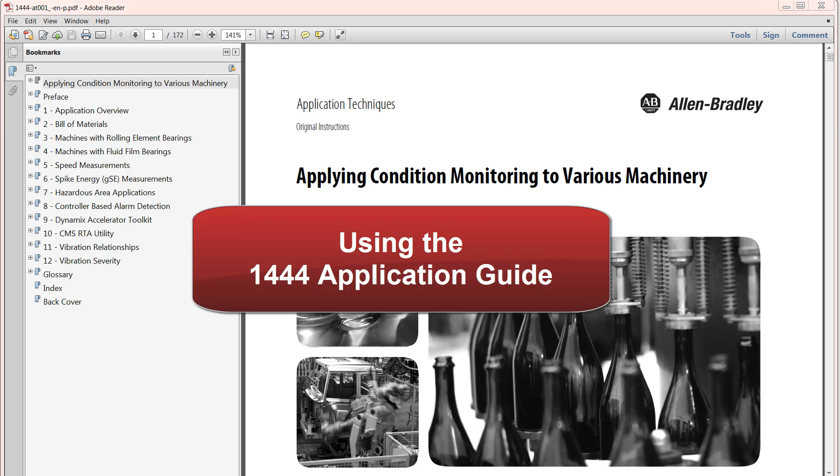This video is intended to explain how to use the Dynamix 1444 series application guide as an aid in determining and implementing monitoring solutions based on smart machine concepts. The guide will help to explain how Dynamix can be applied to make a smart machine. Smart machine technology, when built into the integrated architecture, can enable solutions that make machine conditions simply part of what you do.

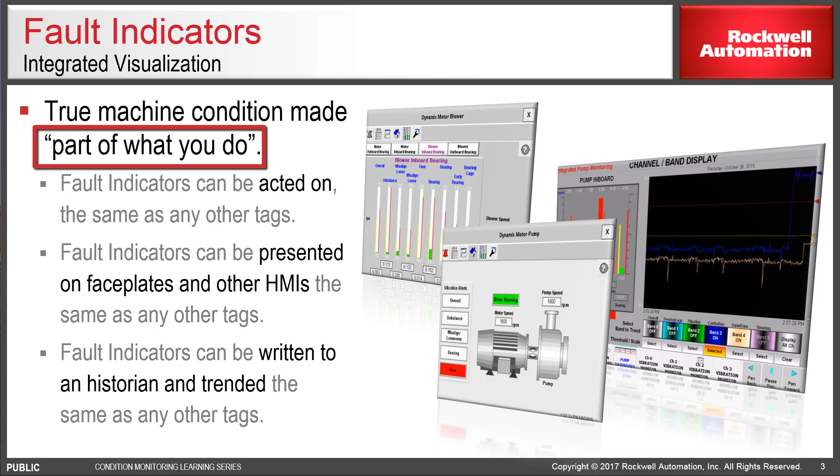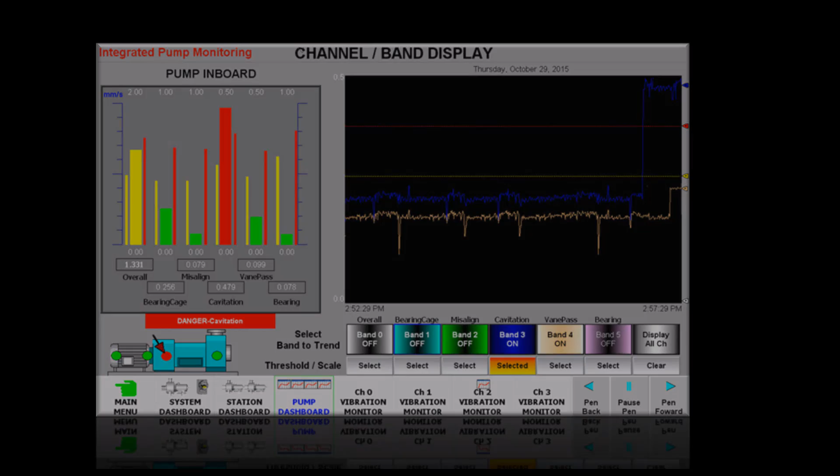Presenting condition rather than simply vibration encourages very different behavior in operators, maintenance personnel, and management. Consider the difference in behavior if a high vibration alarm is presented versus the behavior if the indication was severe cavitation, moderate misalignment, or severe imbalance. And how does behavior change when responsible personnel can observe the propagation of these faults simply and easily using the same tools that they use to trend other common parameters such as load, pressure, temperature, or tank levels?

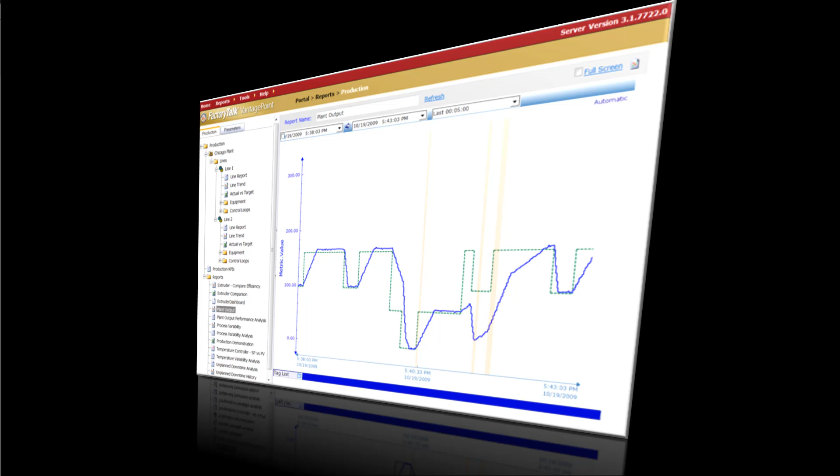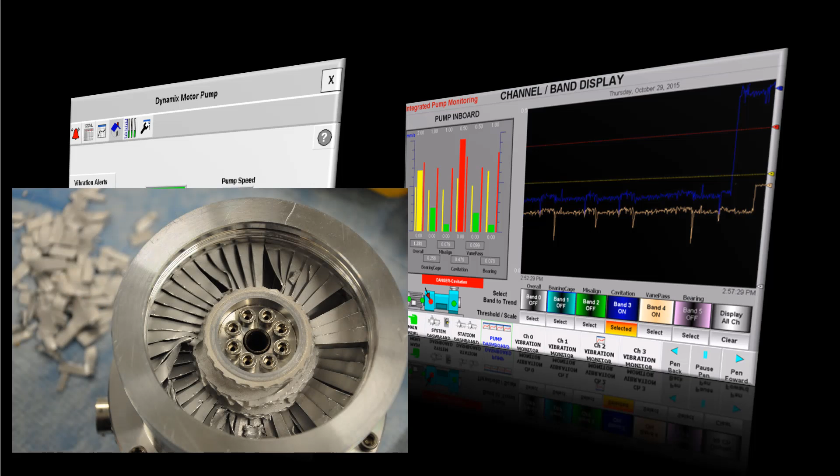Using these tools allows users to easily correlate vibration, or for example cavitation, with other process parameters. It may take something, such as a specific combination of valve position, tank level, or pressure in a particular operating pump, to cause that pump to cavitate violently. How would knowing this affect operations? How may it benefit the facility?

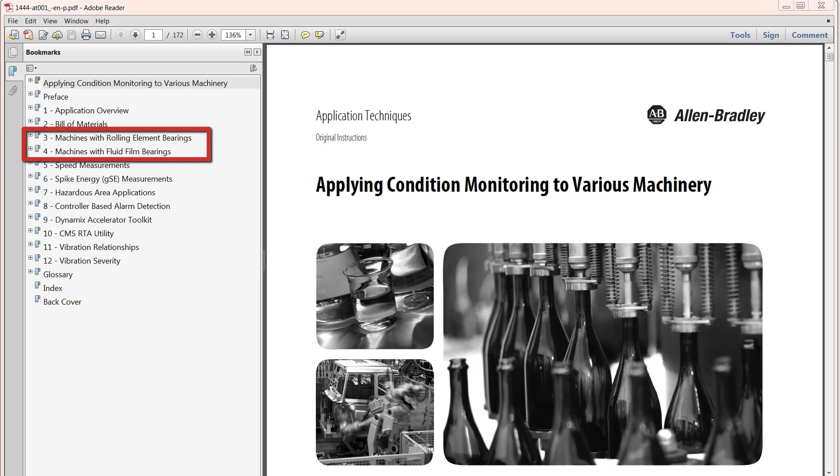So let's look at the guide. First thing to understand is that there are three major areas of the guide. There's the introductory part, which includes some important information that is used in the actual machine definitions themselves, and then of course the machine definitions, which talk about how to monitor the machines. And thirdly, it includes sections that provide ancillary but often very useful information.

So let's look at the machines. In the application guide, machines are grouped as those fitted with rolling element bearings and those fitted with fluid film bearings. Now let's look at machines that are fitted with rolling element bearings. The list is broken down by the machines that are components of the larger machine. These are the drivers, typically motors, but perhaps turbines of some sort, and then the driven equipment, whatever it is driving, whether it is a pump or a fan or a blower or perhaps a gearbox.

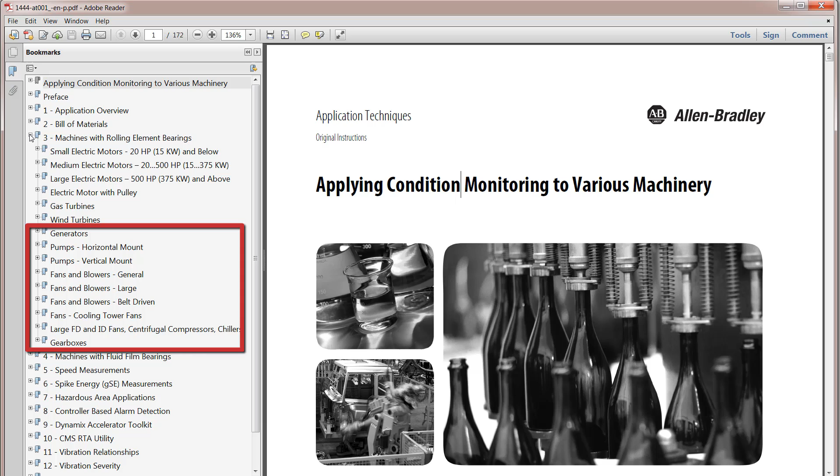If we look at a specific machine, let's say a belt-driven fan, you'll see that the information in here includes monitoring requirements and the sensors, and then the faults and the band limits and definitions, and then the alarms that you might apply. And these are going to be the same regardless of the type of machine. They will all have the same kind of information.

If you look at the details, the sensor and monitor requirements always come first. And this one is very brief. It simply says the fan is monitored with one or two general purpose sensors that are mounted at each bearing. Okay, so how do we understand what that means?

The sensor requirements are actually defined in the bearings discussion. So where we talk about bearings, it will talk about the sensors that you have to apply and give you some guidance on how many to apply and where to mount them. So if we look at that, look under bearing type. In this case, we're using rolling element bearings. If you go down a page or two, you'll see that there's a discussion that says for machines up to 500 horsepower, one radial sensor per bearing is normally sufficient, normally mounted in the horizontal direction.

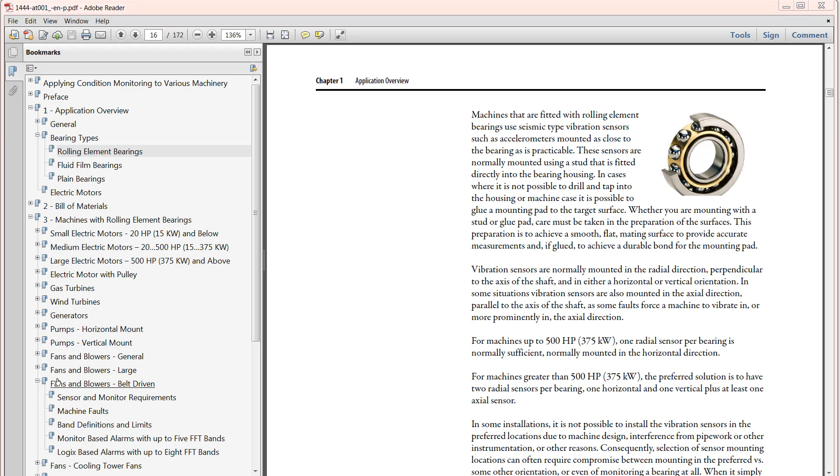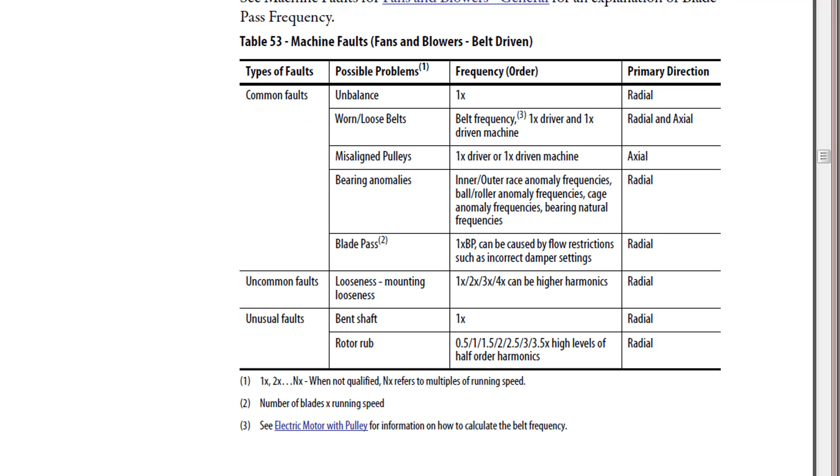So for the fan, coming back down here, you will simply mount one sensor, if it is a small fan anyway, under 500 horsepower, in the horizontal direction at each bearing location. The machine faults then are listed following that. This is a list of the common faults that might occur on the machine, and the uncommon ones that are unusual but might occur, and unusual faults that are pretty rare.

After the machine faults, the guide then talks about band definitions and limits. The band definitions are simply some guidance on how to set up the larger signal processing such as Fmax, the maximum frequency of the measurement. These will be applied to the bands, which we'll talk about in a minute.

But in the section as well are the alarm limits. And this is talking about the overall alarm limits that are applied to the measurements that are made. Overall is a very common thing. It is for most machines how you monitor them, and is the big guidance number that protection is almost always based on anyway, and what standards are applied to.

So in this example, it is telling me what the overall alarm limits are for this class of machine. And it also tells you where these come from. It talks about ISO standards that are applicable to this particular machine. In this example, there are two ISO standards that may apply, 14694 and 10816-7. Those are actually listed in the guide as well.

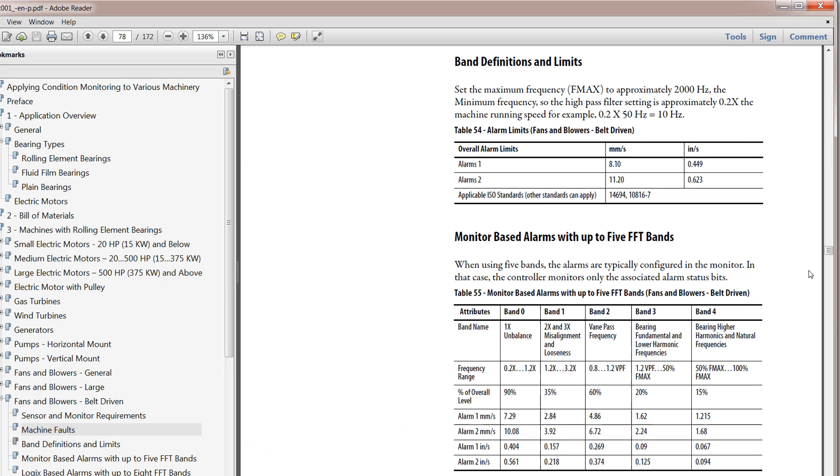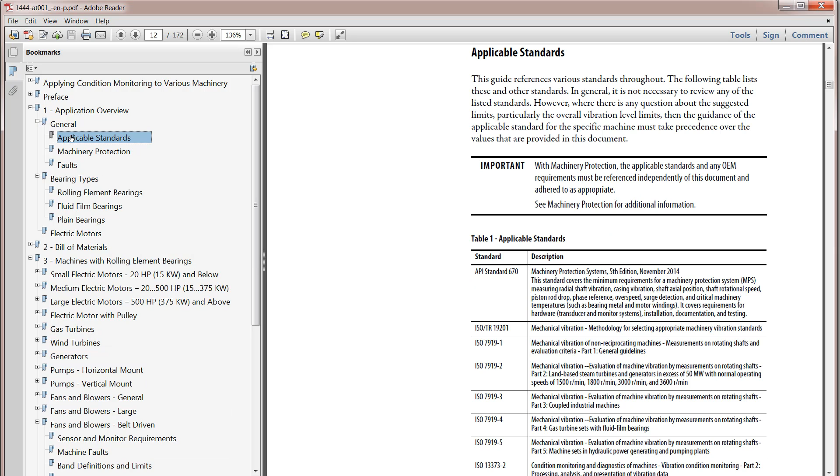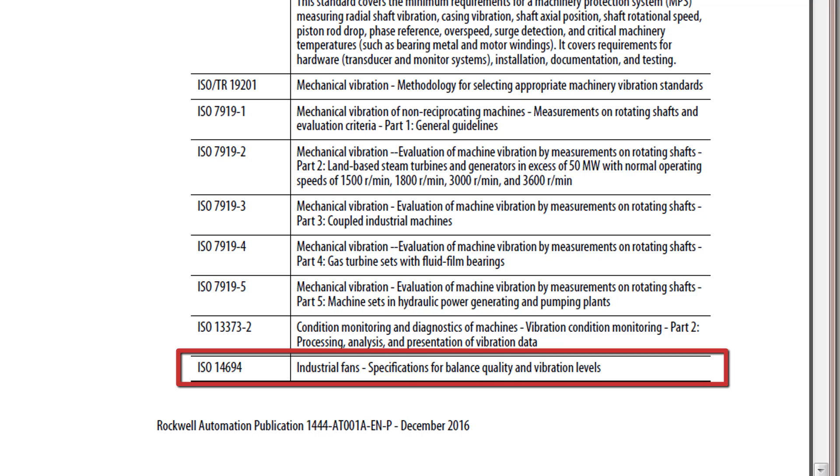If we go back to general information, applicable standards, then scroll down to find 14694, a little too far. And there it is at the bottom, industrial fan specification for balance, quality, and vibration levels. So that's where, if the user wants to get into more detail of where the specification comes from or what the number means, that's the standard.

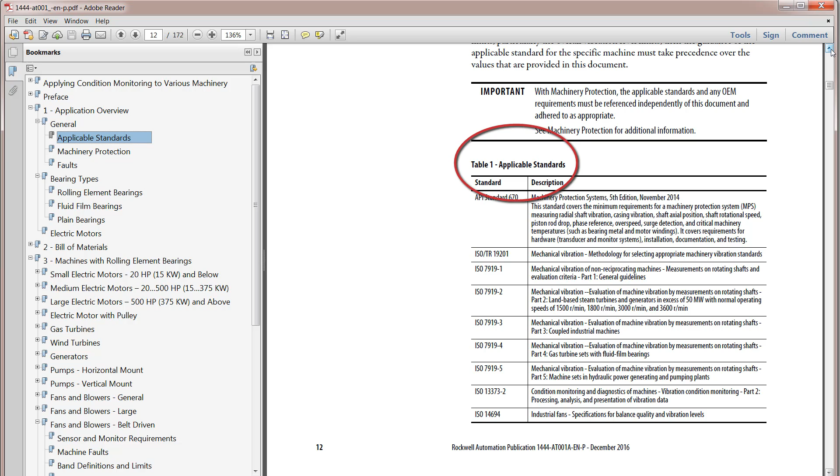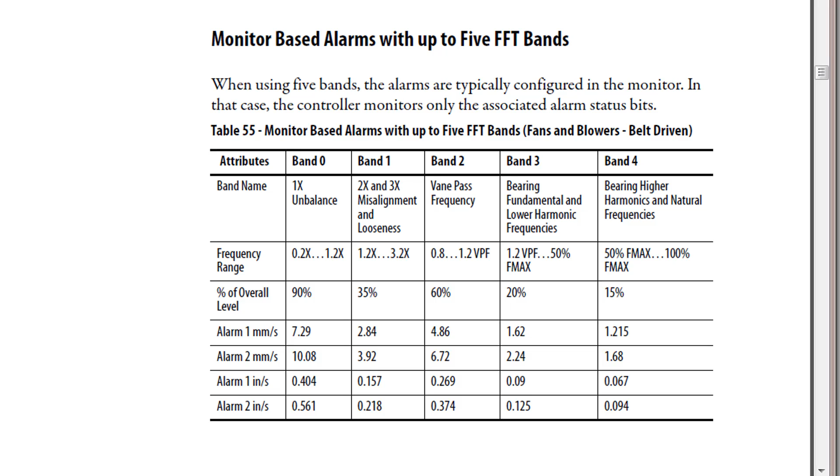This then is a list of all of the standards that apply and that are referenced in the guide. It's where the overall alarm limits that are stated throughout the guide come from. Following the band definitions and limits, we have the list of alarms that we would define. These are defined in terms of FFT bands. We talk about bands that you would define to monitor typically the common faults that we just talked about and how you would do it.

So this example talks about how you set up 5 bands. Band 0 is going to monitor the unbalanced force. Band 1 is going to monitor for indicators of misalignment or possibly looseness. Band 2 is vane pass frequency, and that is an indicator of turbulent flow, so you have a flow problem through the fan. Band 3 is bearing fundamental and lower harmonic frequencies. And band 4 is bearing higher harmonic and natural frequencies.

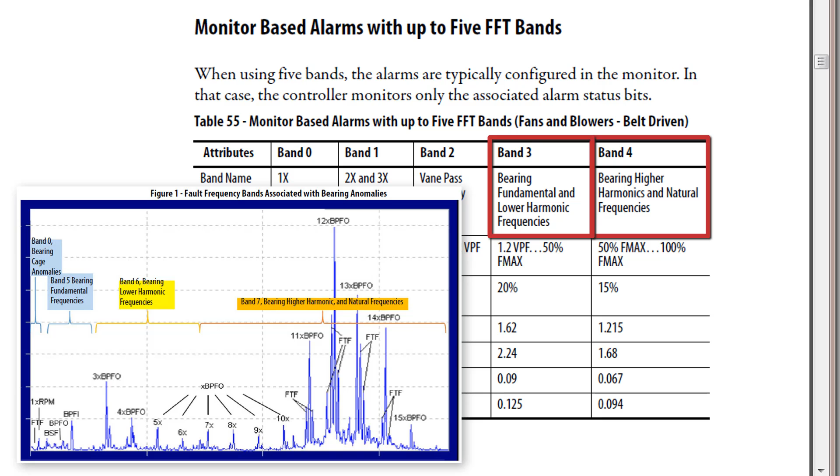If you have a bearing fault, typically band 4 will elevate first, and then as the bearing degrades, at some point you will see band 3 elevate. So in one sense, band 4 is early bearing fault detection, and band 3 would be an indicator of late bearing fault detection.

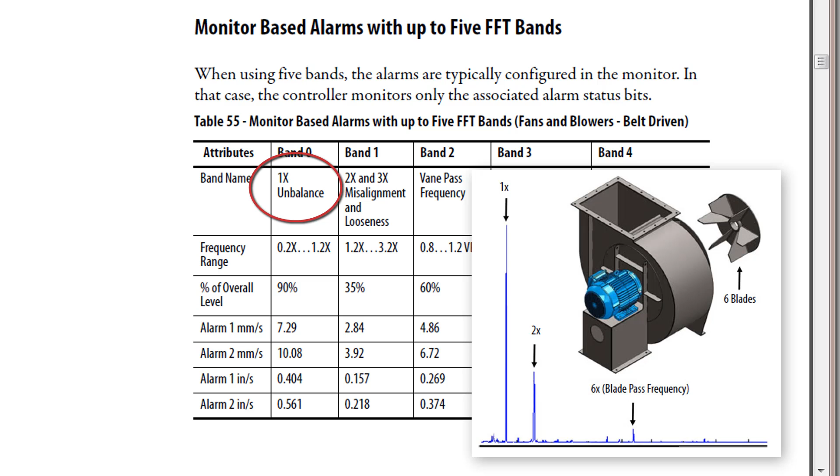After each band, it is telling you the frequency range that is used to define the band to monitor that particular indicator. It talks about percent of overall levels. This is talking about the maximum amount of energy in that system that this particular indicator should comprise. So imbalance, for instance, should be the dominant force, certainly, but not really ever more than about 90%. If it grows greater than 90% of the overall, then that might tell us that the unbalance is growing dramatically and become such a dominant element. If you have a badly unbalanced machine, the unbalanced force is, well, almost all of it.

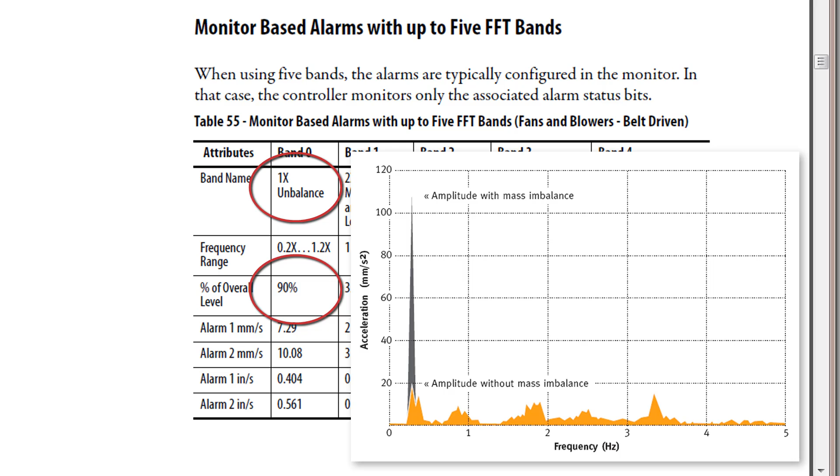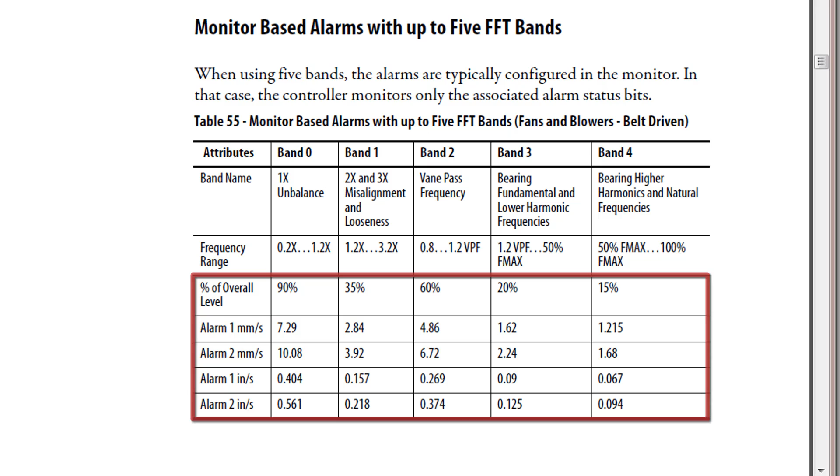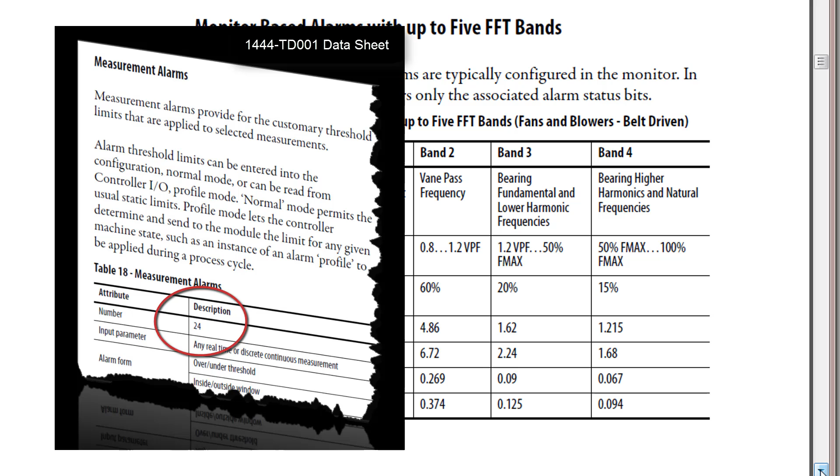So 90% is a number, and then the alarm limits below that are simply the alarm limits that we talked about a minute ago, times 90%, whether it's in metric or English for the alert and alarm levels. So we have those same numbers for each of the 5 bands that you might apply. These bands, if applied, can be done entirely in the module. The module has 24 alarms that it can define. If we did 5 bands per channel, that's 20, so we can certainly do all of these plus the overall levels all in the module. So the controller need only monitor status information, so it's very, very simple.

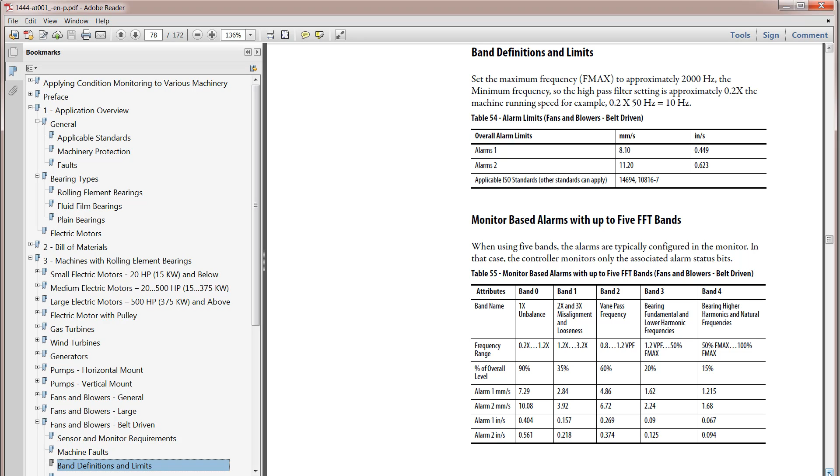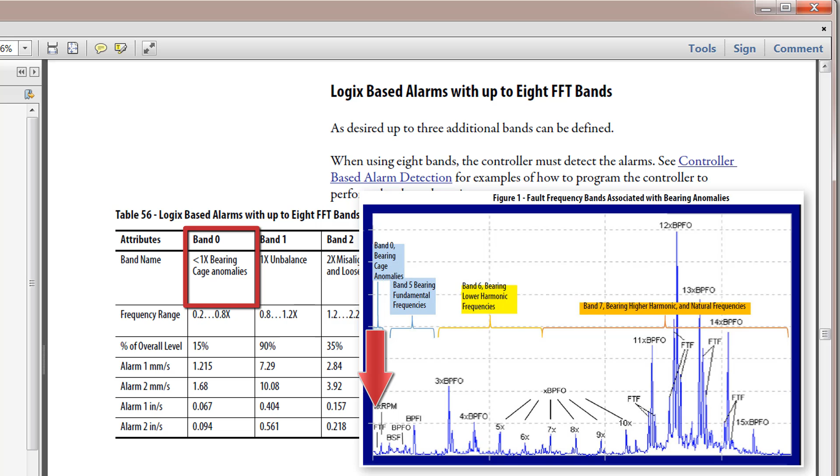However, there are 8 bands that you can define per channel, so if you want to take advantage of that and monitor more indicators of fault, then the guide provides further information and guidance on, okay, if you want to use 8 bands, and then probably do the alarming in the controller, then this is what we suggest that you do as well. So in this case, we're going to monitor band 0, which is lower than 1x, bearing cage anomaly. So when we talk about bearing faults, one of the specific indicators occurs less than running speed. So we're going to monitor that. The other bearing fault indicators occur greater than running speed.

So we do the lower than 1x, then we do the unbalance, and we do misalignment and looseness, and band 3 is also misalignment and looseness, but it's the 3rd order. Typically that's the differentiator: if 2 and 3 are elevated, then it is more likely looseness. Band 2 only, then it is more likely misalignment, but it depends a little bit on the machine. Band 4 is vane pass, which indicates a problem with flow, which could be an obstruction or a problem with piping or something of that sort that is causing turbulent flow through the fan. Of course, it could be damage to the blades as well.

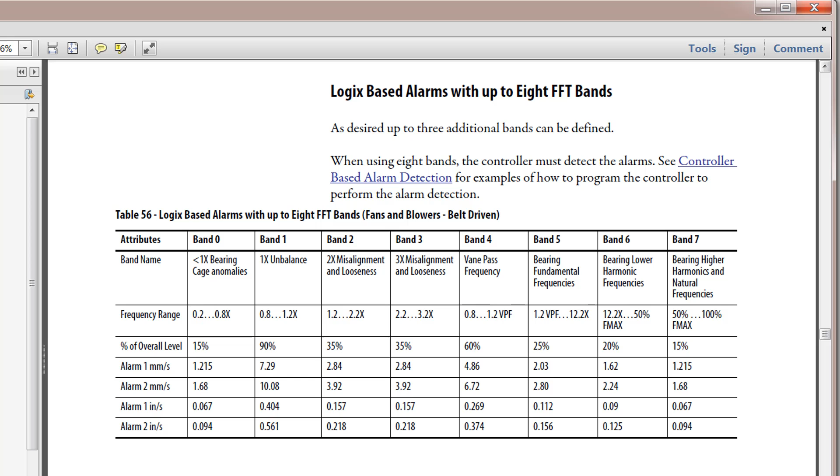Bearing fundamental frequencies, this is the area right above vane pass. It is indicative of the other bearing specific fault frequencies, those higher than 1x. And then 6 and 7 are the same as what we just talked about a minute ago. So this provides better information about what's going on with the machine. But it does require that if you do alarming, you do it in the controller because the module simply doesn't have that many alarms. That may or may not be entirely true. If you do not use all 4 channels, then you could apply the 24 alarms in other ways. So in some cases, it would be sufficient.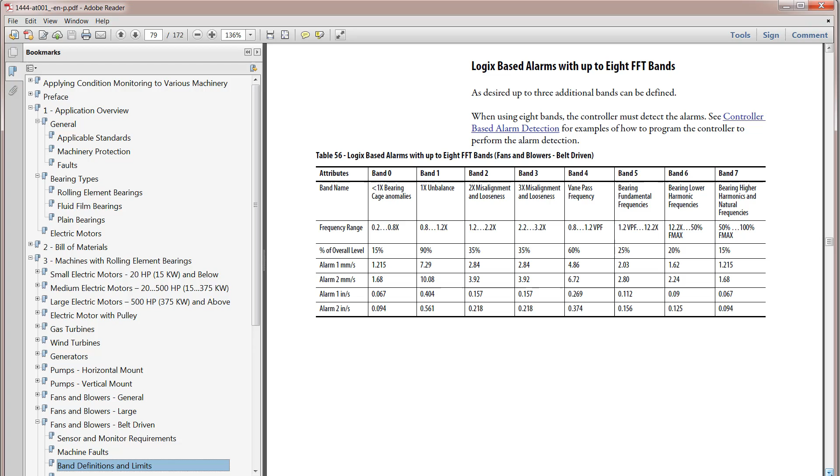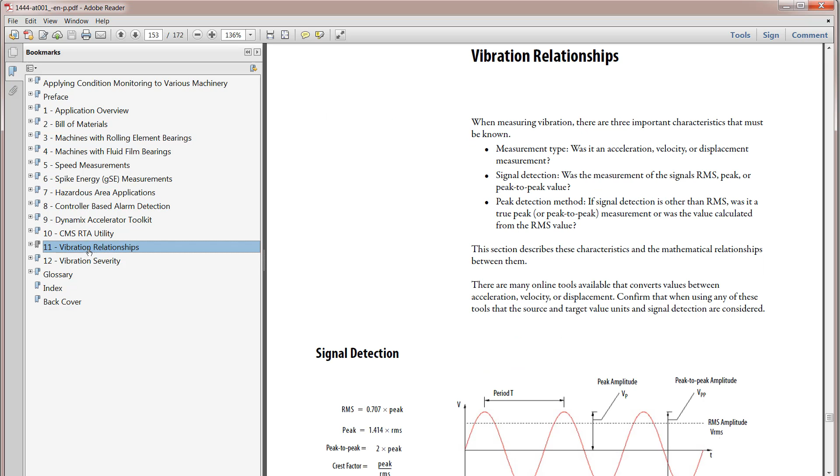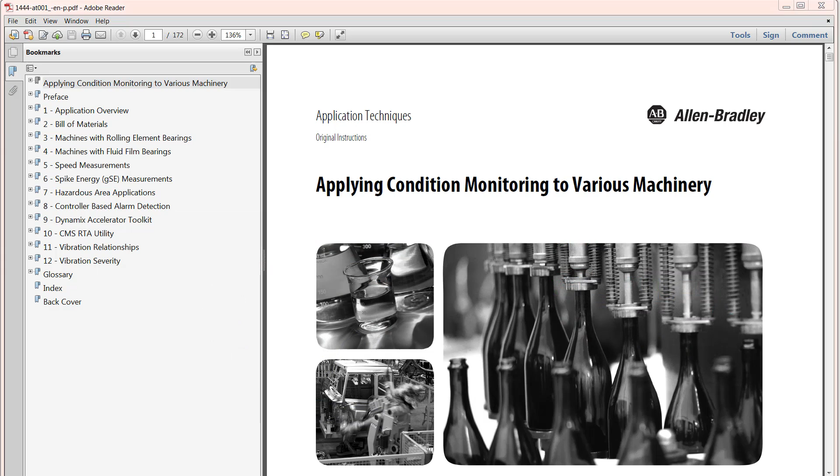The Dynamix Application Guide can be a tremendous resource, not just in instrumenting a solution or defining the details of a solution, but also in imagining a solution, what could be done with the 1444 architecture. The Dynamix 1444 series is a unique product that, when made part of the integrated architecture, can make an extraordinary solution. There is nothing like it in the industry today. Use it to define how a machine could be monitored, how to create a smart machine.

The application guide is available on the literature library. Simply search on 1444-AT, download the guide, and start making smart machines.